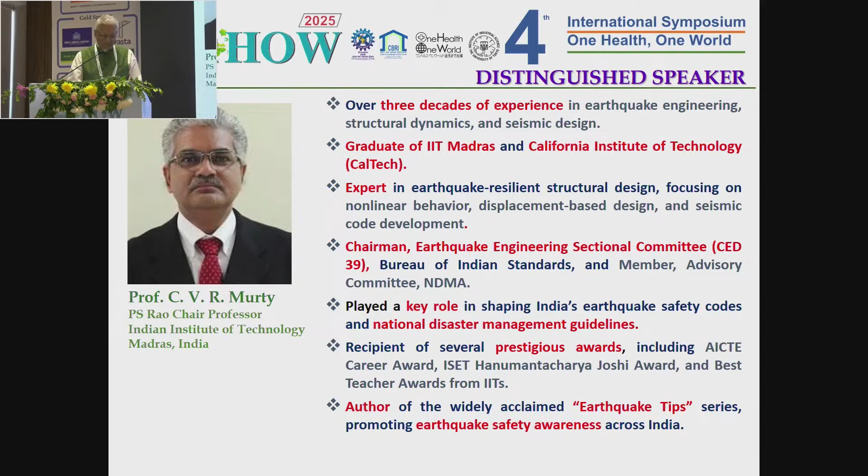I have only 2 requests. One is that together we can build competence in these nations. When I say competence, I'm looking at 3 interest groups specifically: architects, engineers, and artisans. There is so much good practice happening in these 13 nations that we need to collect and see if they can be adopted or adapted to these other nations, taking advantage of the hard work, experience, and lessons learned in past earthquakes and other disasters.

I look at this event as yet another beginning of a very solemn effort to protect the people in these nations. The numbers that Professor Pradeep Kumar mentioned of the losses of lives and property tell us that, at least in India, we are far away from getting those numbers down to single and double digits. But having said that, it's an urgent requirement for us to do it, and we are hungry and eager to learn from all the colleagues presenting, both from within the country and from other countries. Ladies and gentlemen, thank you for your time and attention.

Thank you, Professor Murty. We are highly honored to have with us our guest of honor, Dr. Krishna Vatsa, Member, National Disaster Management Authority, Ministry of Home Affairs, Government of India, New Delhi. I request Dr. Vatsa to kindly deliver his address.

Yes, this side. Sir, please take my number. No, I would like to check. Yes, sir. That's my screen. No, no, that. Can you see? No, my PPT. Okay, okay, thank you. Sir, can I? Yes, please. You, sir, just, is it here? No, sir, please.

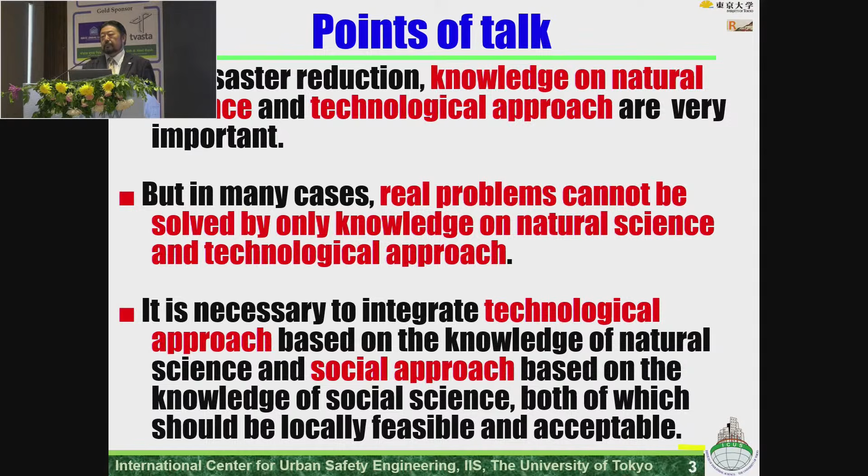And the other mitigation is, if you know this area is a dangerous area, for example, soil condition is bad, then by using land use management, the authority should not give permission to use that area or to construct houses. That kind of one we call land use management mitigation. And the second,

preparedness. Even from the viewpoint of a critical approach, it is possible, but it costs too much. We cannot adopt such a measure. In such case, we prepare something before the hazard attack, and then we can reduce the affected area, or we can reduce the negative impact propagation velocity. Namely, preparation of the organization to respond, or preparation of the recovery reconstruction plan, preparation of disaster manual, or carrying out disaster drills. These are the elements of preparedness.

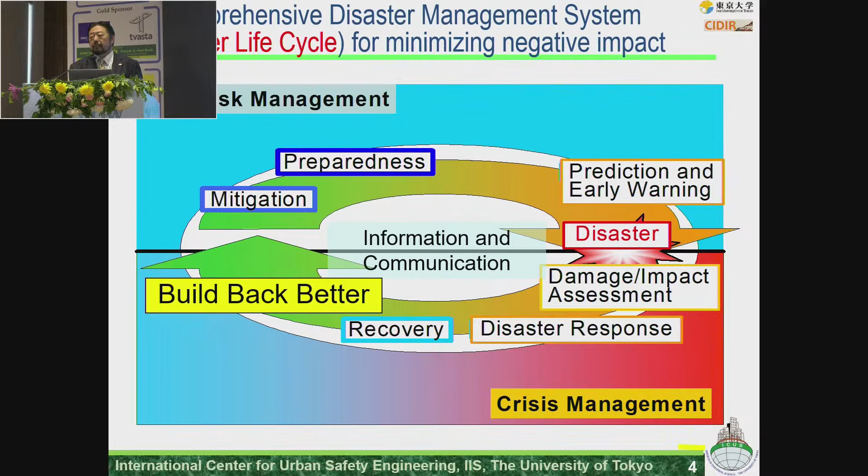To do this, not only scientists and engineers, we need a lot of different field persons. Otherwise, it's impossible.

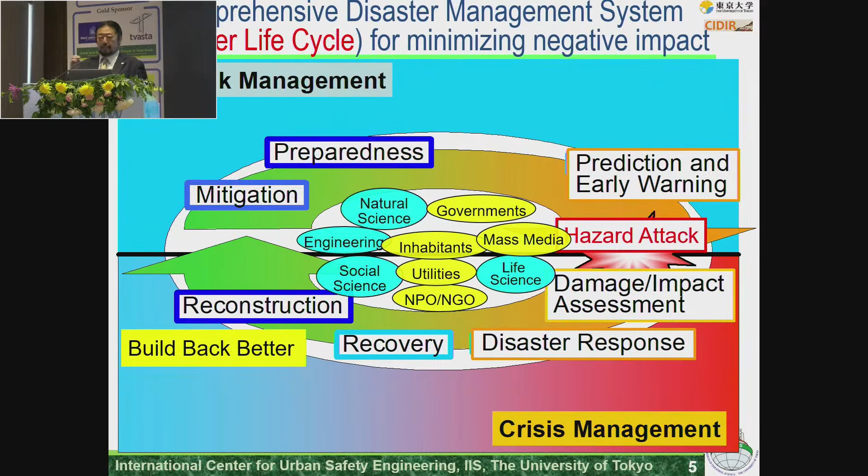Input is a hazard - earthquake itself, cyclone itself. When I break it down, that is the extent and area of the external force times probability. This is the hazard.

And the system, this is composed of two elements. One is natural environmental characteristics, the other is human-related, social environmental characteristics.

Population density, population distribution, age distribution, infrastructures, characteristics, politics, economics, culture, history, education, and so on. These are all affecting the lifestyle of the people.

And when these two are fixed, the time-related factor becomes relatively important. If your target area has 4 seasons, tsunami in winter versus tsunami in summer will make a very big difference. Also, the day of the week and occurrence time of day matter.

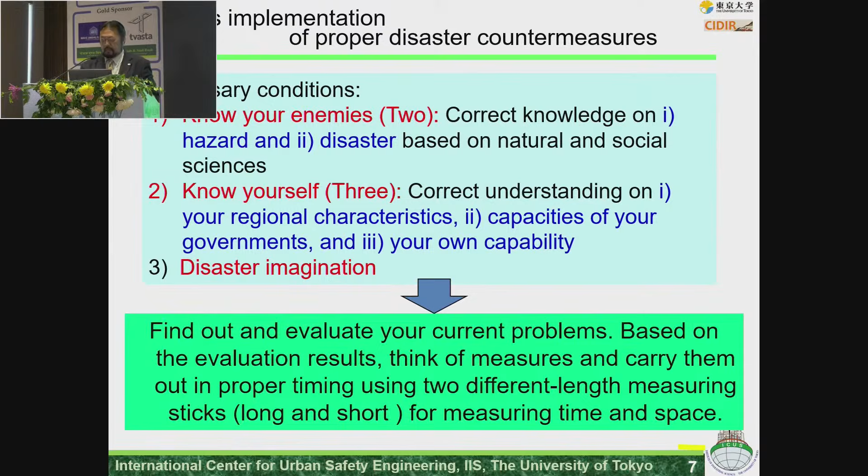And then also show the effects and guide the people. But if you repeat the short-distance ruler solution, there is a local maximum problem, and you get farther from the global maximum solution. That's why we should keep in mind two different length rulers and do the solution in a balanced manner.

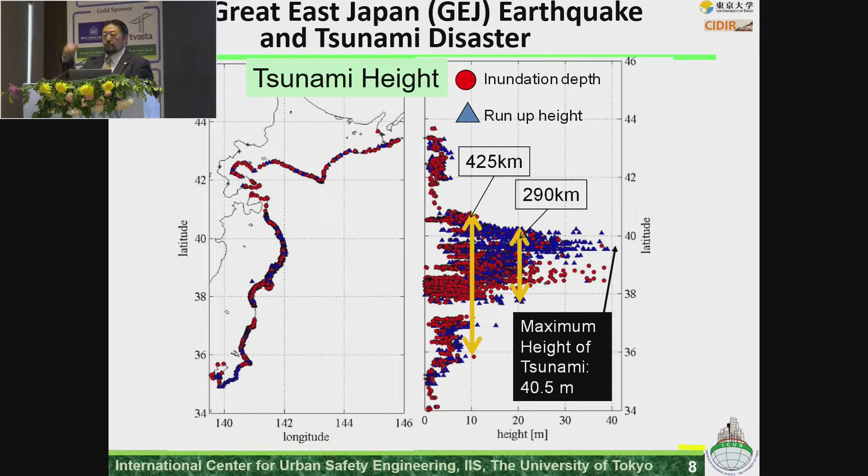I would like to show you some results, a real situation in 2011, the Great East Japan earthquake and tsunami. You can see the very, very high area tsunami attack, over 40 meters - that's higher than the roof of a 10-story structure. We also observed very, very strong ground motion, 3G.

But we could reduce a lot of the structural damage thanks to our senior researchers' research results. It means we could successfully reduce the damage due to a similar magnitude of hazard.

But, of course, we have problems - I will show you later. Totally, more than 22,000 people were killed. And mass media also reported a very big number of people killed due to tsunami and huge monetary loss.

But we should not simply believe the information through media. We should check one by one from the scientific viewpoint.

Even when we prepare very big structural countermeasures and non-structural measures, we should always keep in mind that there are two different aspects: positive effect and negative effect. But before we discuss them one by one, I would like to ask you the meaning of these numbers: 19.7% versus 3%. Do you know the meaning of these two numbers?

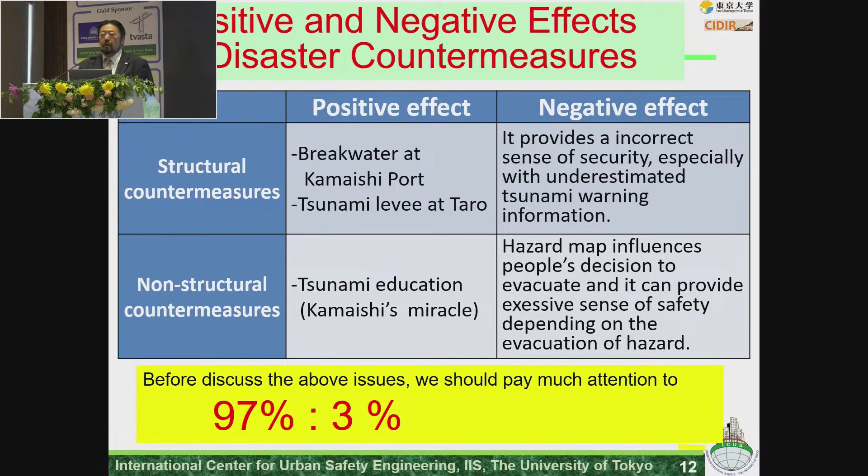Before I explain the numbers' meaning, let me show you some photos. This is the disaster management headquarters office of Minami Sanriku Town. When I visited and took this picture, the color of the structure was something reddish. On the roof you can see the telecommunication tower, and beside that, a white box.

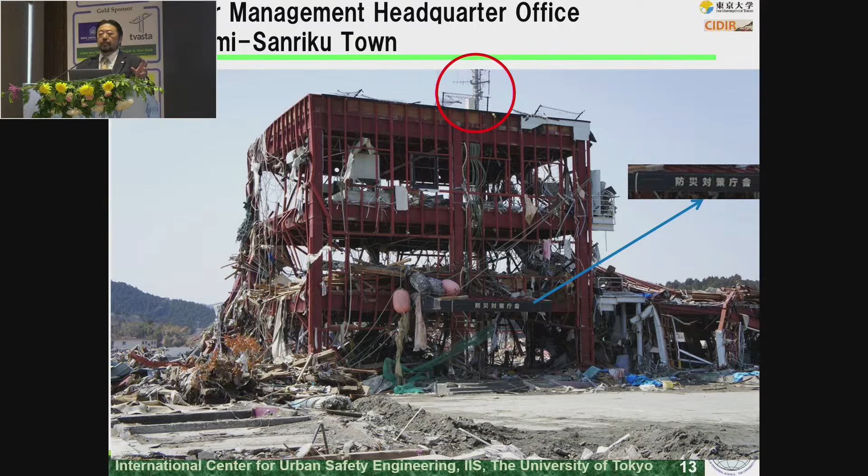I was very surprised to see the next photo I'm about to show you. One guy climbed up to the tower and took a photo, and fortunately that guy was saved and survived. Now let's look at the photo.

This red box is that, this white box, oh, this one. Okay, and this is the fence, these are the fence.

Again, I was surprised to see the photos taken by another person, a local photographer from the area. When I visited there were no structures around that headquarters office, but actually it was surrounded by many structures, and on the roof you can see many people wearing red jackets and blue jackets. The tower will be here, somewhere here.

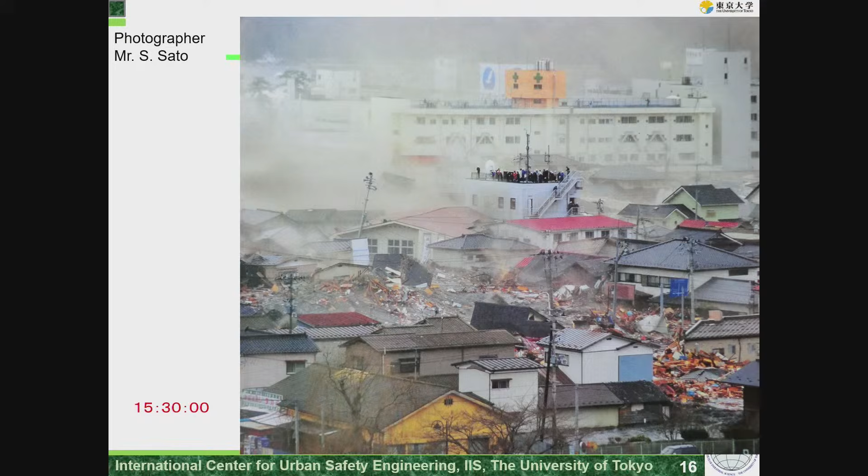Then you can see the guy who took that photo. If you watch very carefully, you can see some persons here holding the fence, and here is a very big wave. Behind or under this big wave there were stairs, and fortunately the stairs were not broken, so some people could be saved.

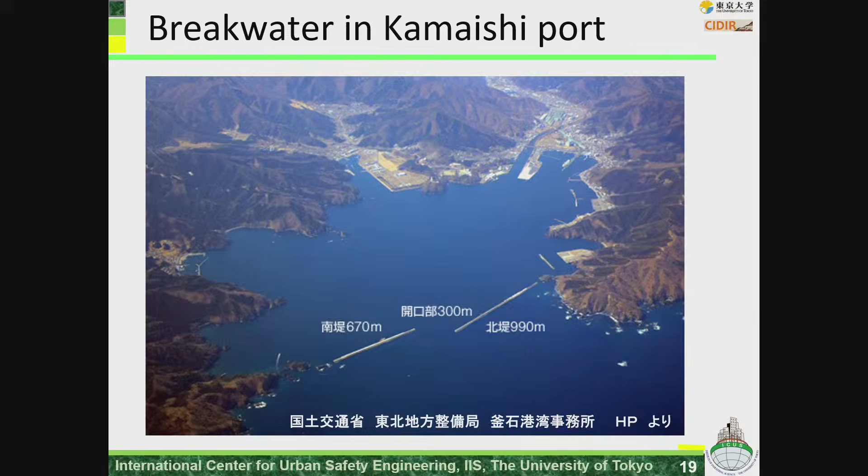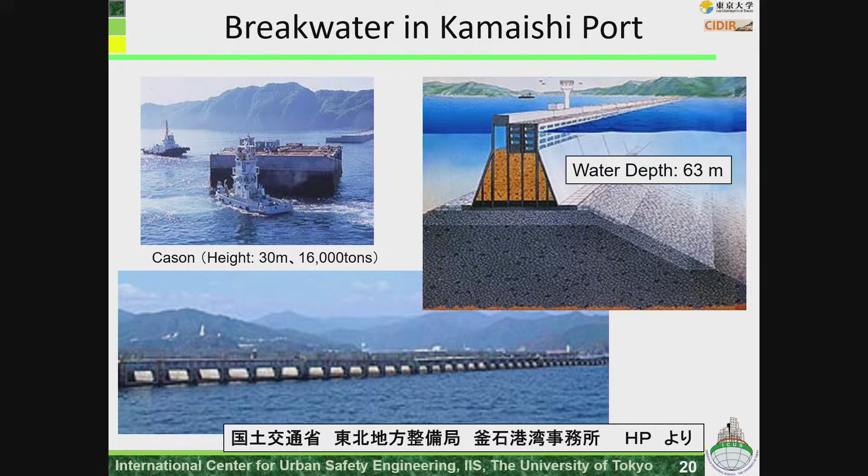This is the next one: the Kamaishi breakwater. This breakwater was written in the Guinness Book of Records as the world's biggest breakwater. The depth of water is 63 meters. They constructed a very big mound, and on it they put a caisson, preparing a very big tsunami breakwater.

But when I visited there, such a huge structure was broken. Mass media reported that we spent a lot of time and money, but these facilities could not play their expected role, and many people were killed. But this is wrong.

Based on a very high accuracy numerical simulation of the tsunami, what we found is that a 6-minute delay could be given to the people. Suppose you are a person inside the port and you need to evacuate - at the very last moment, whether you have 6 minutes or not makes a very big difference.

In a normal wave, the water particle just moves down, but the water itself does not move. In a tsunami, when the depth becomes shallow, the water from the base to the top moves together. Therefore, when there is a wall, it's impossible to prevent the overflow, but under the wall, a very big volume of water could be prevented from coming in. Therefore, inundation depth and runup height could both be reduced by 30 to 50%.

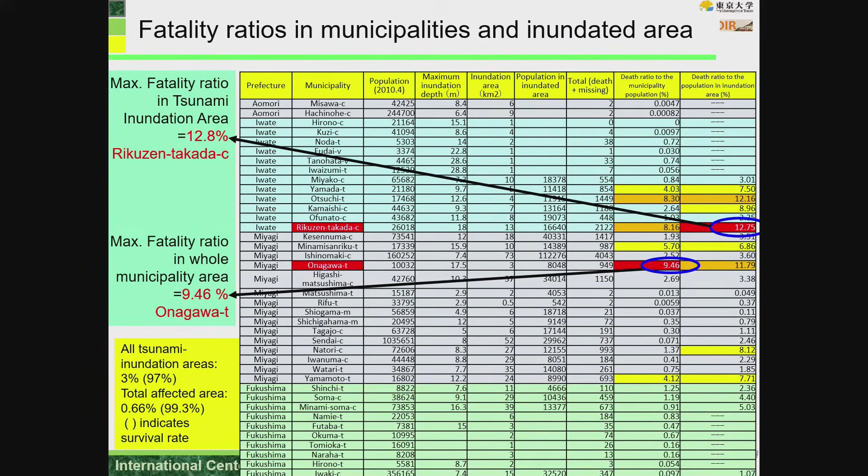When I check municipality by municipality, only within the inundation area, the highest fatality ratio was in Rikuzentakata city, at 12.8%. When we include the whole area of the municipality, Onagawa-cho town had the highest fatality ratio at 9.46%. But when we compare with the past, you can see that this time's 9.46% was the highest recently, though in the Meiji Sanriku tsunami about 100 years before, the fatality rate was much higher than this time.

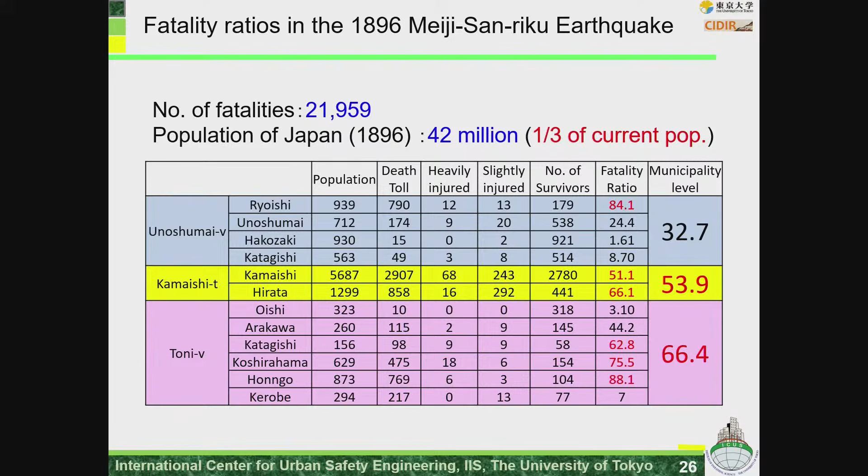Especially in the Taro area, during the Meiji Sanriku earthquake the death rate was 83.1%, in Showa it was 32.5%, and this time it was 3.9%. Based on lessons learned, they implemented many disaster countermeasures and drastically reduced the damage. But mass media could not analyze or report the real situation.

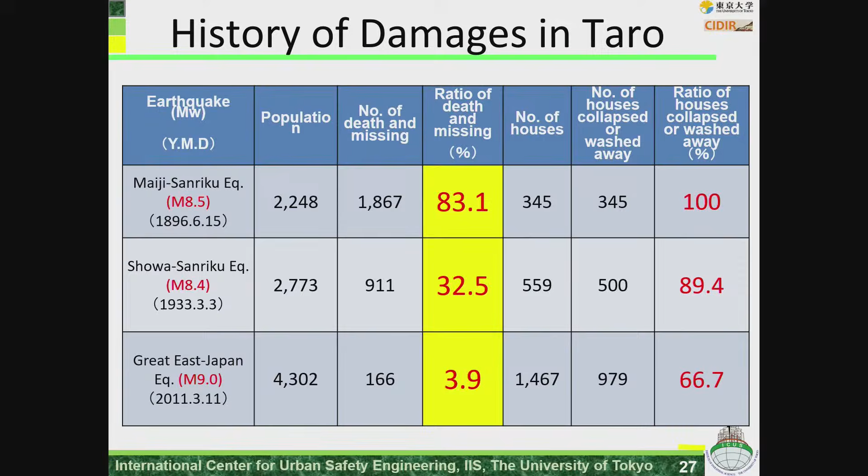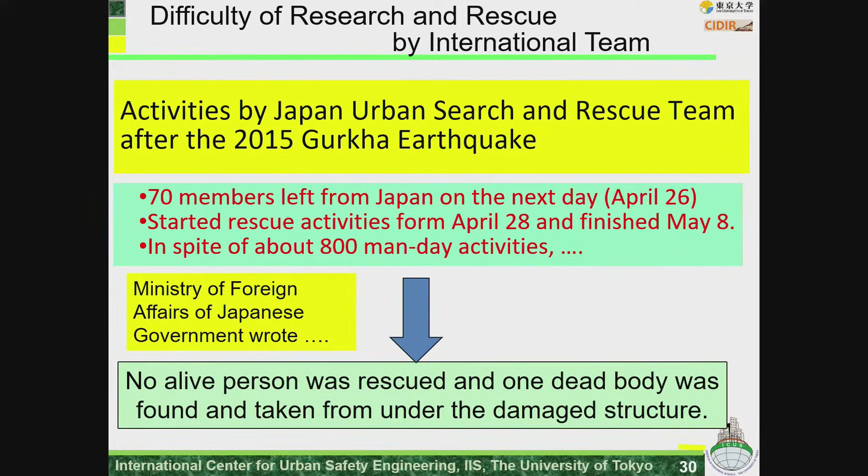In total, around 800 man-days of activities were conducted. The Japanese Ministry of Foreign Affairs wrote on their website that for these activities, the government of Nepal and Nepali people expressed their sincere appreciation. But could you guess how many people could be saved? Unfortunately, how many dead bodies were taken care of by the Japanese team? Because of time limitation, I will just tell you: no people saved, just one dead body. This is all the Japanese team could do.

So what I'd like to say is, it is quite difficult to save people. But many people, especially from developing countries, think that emergency response is the most important countermeasure of disaster management. This is wrong. Pre-disaster countermeasures are quite important. But to implement pre-disaster countermeasures, we should pay attention to social systems and human behavior, not only the engineering approach.

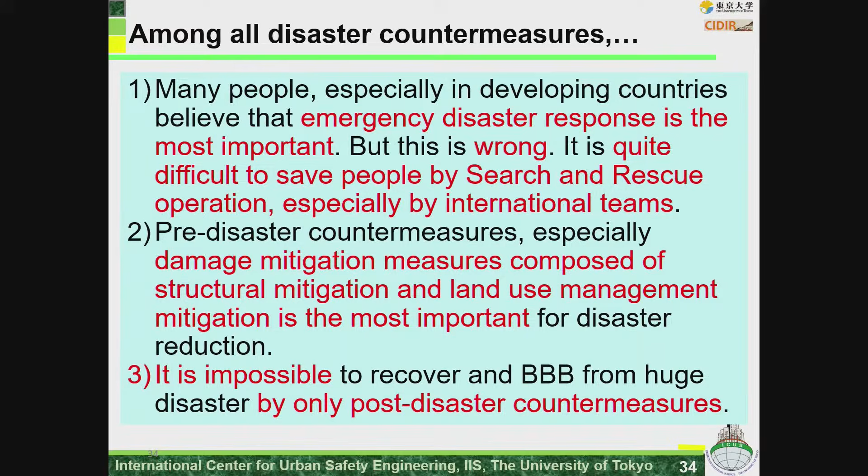Even if you establish a proper design code, if the people do not follow it, nothing happens. Your developed code may be very sophisticated, very advanced, but if people do not follow it, I can say that your code is a bad code.

Then how do we let people follow it? There are three patterns, three types. One is the penalty system, but where governance in a country or region is limited, this system cannot function well. A much better one is the incentive system: if you follow it, you get a benefit. Number three is to disclose information and guide people. If you use this information well, you can have benefits in the future.

I will skip this. So when I look over disaster-related projects in the world, 90% of projects just focus on the emergency phase, by number of projects. When we check the budget by the World Bank, 70% is focused just on emergency, 20% on recovery and reconstruction, and preparedness or mitigation gets less than 4%.

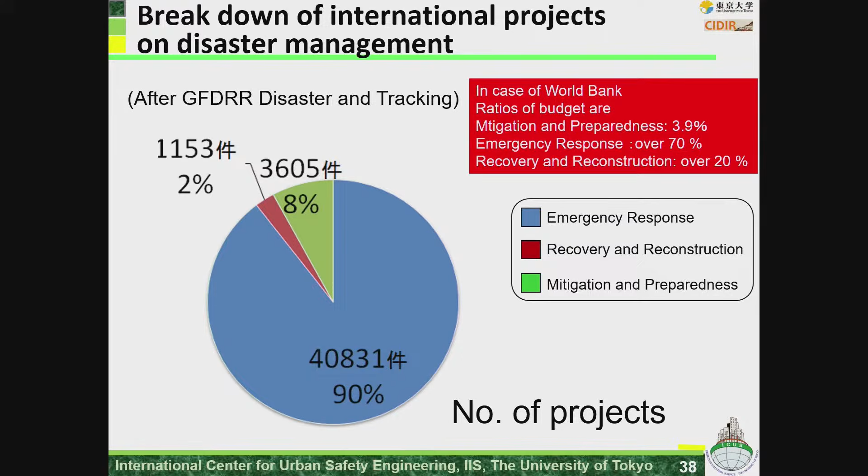First, it's easy compared with pre-disaster and post-disaster countermeasures. If you want to establish pre-disaster countermeasures, you should visit the site first and survey the real problem, then establish an original program one by one - it takes time. But for emergency phase projects, once you establish the system, even if the target area's characteristics are different, you can apply the same methodology. Post-disaster countermeasures fall in between.

When we check, Japan was previously fifth, but now it's first. The US is now in the second position. But in the US, 90-91% of money is used for emergency response. In Japan it's 54%, which is the world's biggest for pre-disaster focus. Next, how to solve the current situation and understand the reasons.

First, as I explained, it is easy. The next reason is that if you are a representative of a project, you are always asked by investors or donors who gave you money to have high presence. The easiest way to have high presence is to let the media report it. Media reports disaster-related activities only after big disasters. Therefore it's easy to get presence, which is why even though the real meaning is quite limited, many projects focus on the emergency phase.

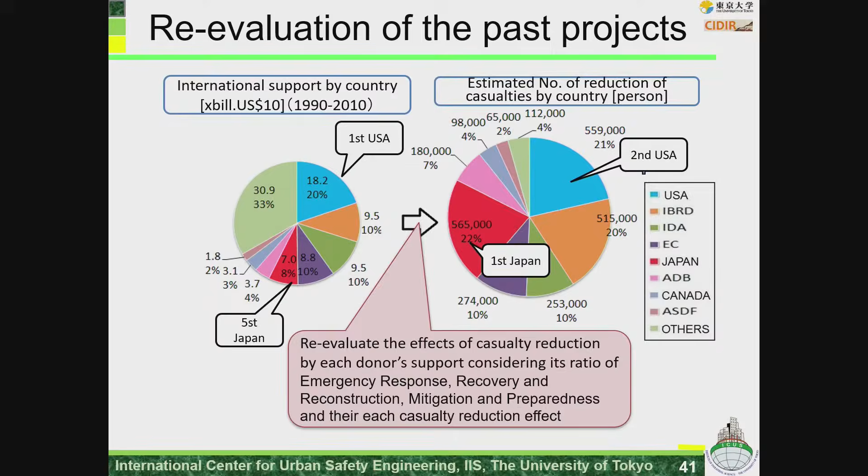From now, we in Japan might face a very, very big disaster - a national critical disaster, like the 1755 Lisbon earthquake or the 1970 Bhola cyclone in Bangladesh, which at that time was East Pakistan. It is quite difficult to recover by only post-disaster countermeasures. So how do we solve such a situation?

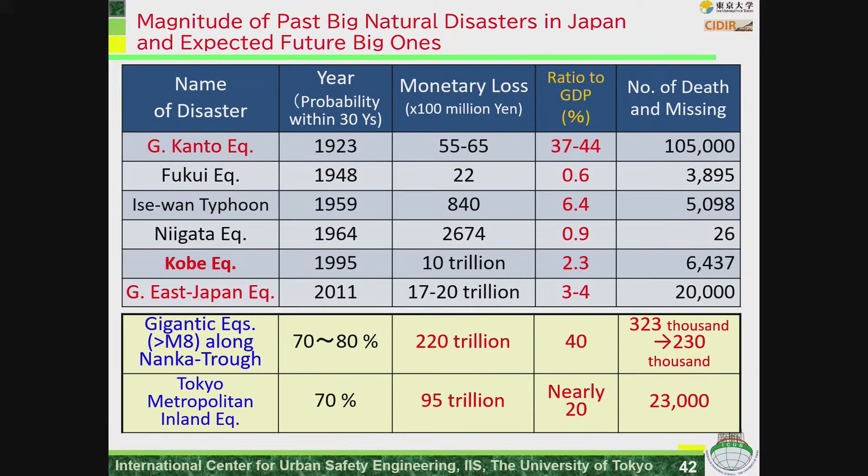Now in Japan, population, society, and budget limitations are getting tighter. Therefore, there are three players for disaster management: public support, mutual assistance, and self-help effort. But public support will be getting smaller. So how do we cover that reduction? Through mutual assistance and self-help effort. Who are the players? Individual persons and companies.

So far, when we ask them to do disaster management countermeasures, we are appealing to their conscience and morality. But it will be impossible to continue this way. We should change our mind - disaster countermeasure is not a cost, it is value. Also, disaster is a very limited phenomenon in both time and space. Therefore, disaster countermeasures that give us benefit only at the time of disaster are quite difficult to invest in or donate to.

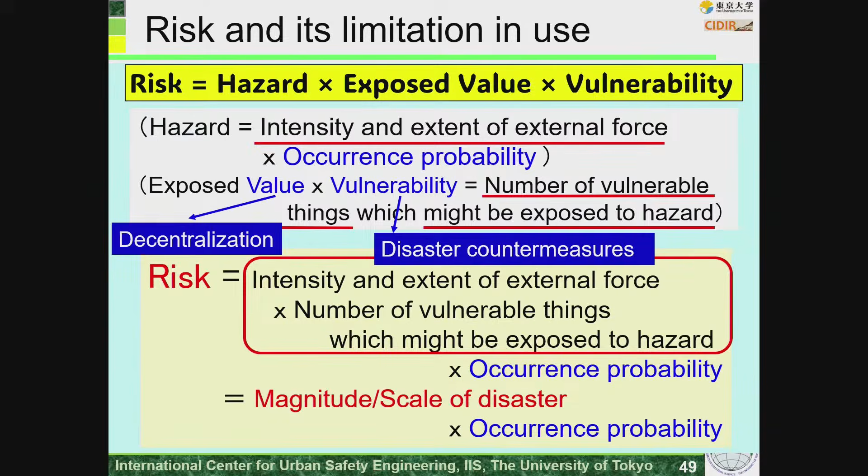So what should we do? First, establish a method for accurately assessing a company's disaster risk or disaster resilience and make it an international standard. Second, design and create a system in which the assessment results are directly linked to the company's stock price - this is the incentive. Third, each company is encouraged to proactively take measures to reduce disaster risk or improve disaster resilience in order to increase corporate value.

Fourth, decentralizing the proper corporate functions will also alleviate over-concentration in the Tokyo metropolitan area. As a result, Japanese companies and citizens will be richer, rural areas will be revitalized, and future disasters will be significantly reduced.

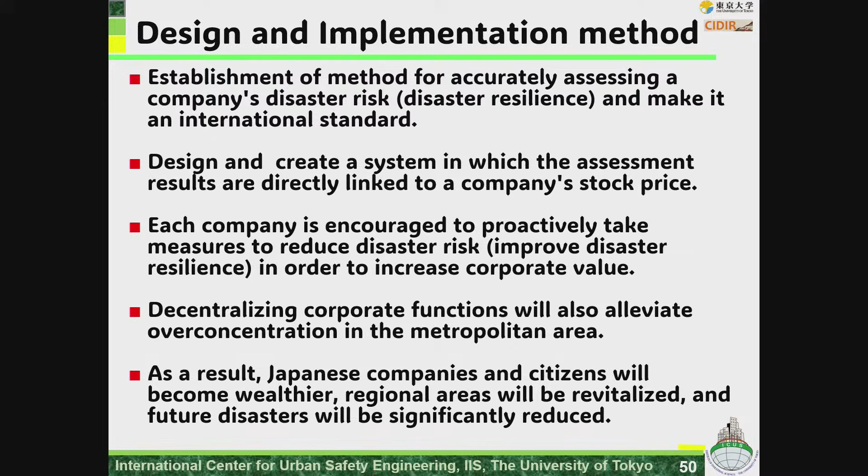Many people do not think this kind of behavior or this kind of system is a disaster management system. But this kind of approach contributes a lot. So we should open our eyes and study more about social systems and human behavior, and propose solutions. By combining the technical approach and social approach, we can solve the problem.

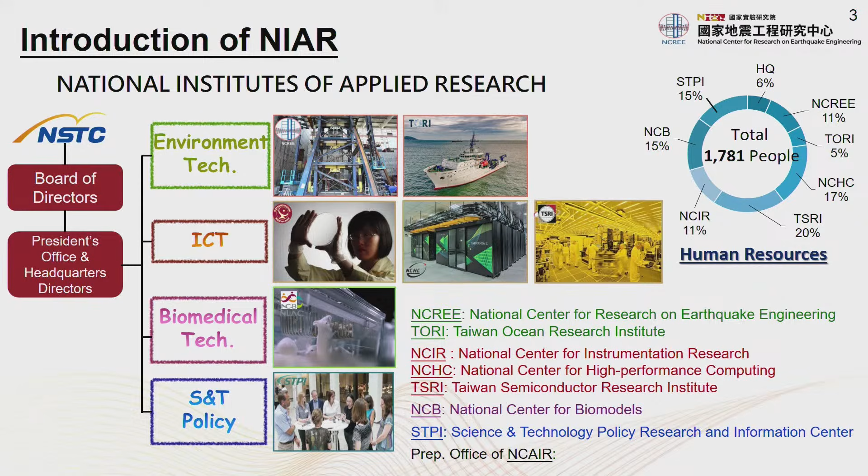NCREE was established in 1990 on the campus of National Taiwan University. Our mission covers before the earthquake, when we do preparation; during the earthquake, emergency response; and after the earthquake, post-quake recovery. We want to integrate all the researchers in Taiwan and also promote international cooperation with others in the world.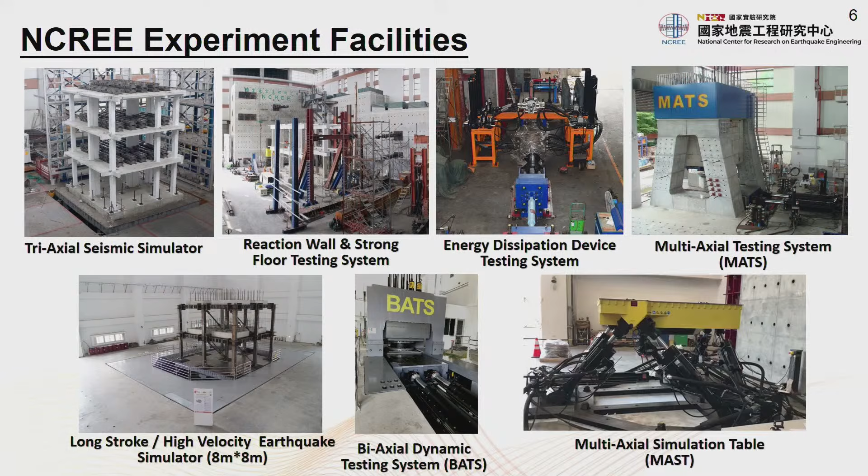Now I want to introduce the structural retrofit program for school buildings in Taiwan. After the 921 earthquake, some school buildings collapsed, and NCREE helped the government develop strategies to retrofit school buildings to protect the students. We determined system capacity not only in the laboratory but also through in-situ testing at the Kowu Elementary School to understand the performance of existing school buildings.

We developed a screening strategy involving preliminary evaluation to identify potentially dangerous school buildings, followed by detailed evaluation to select the truly damaged buildings for retrofit. We developed economical, typical retrofit methods, using jacket columns to enlarge columns, and shear walls or wing walls to increase capacity in vertical elements.

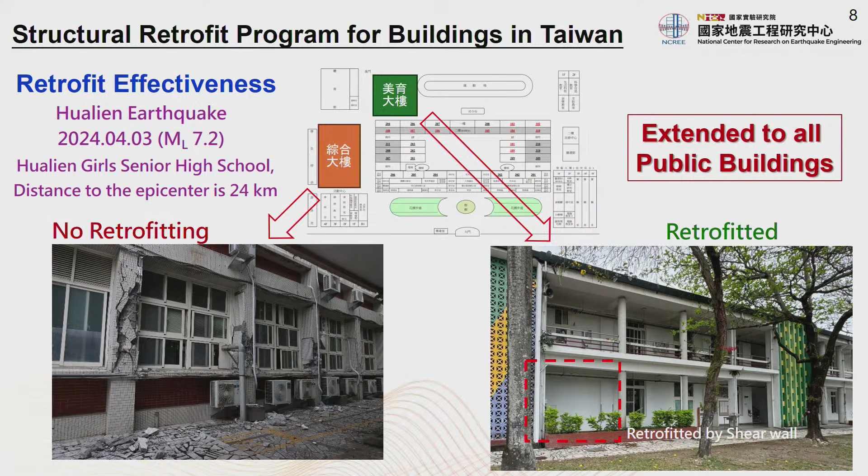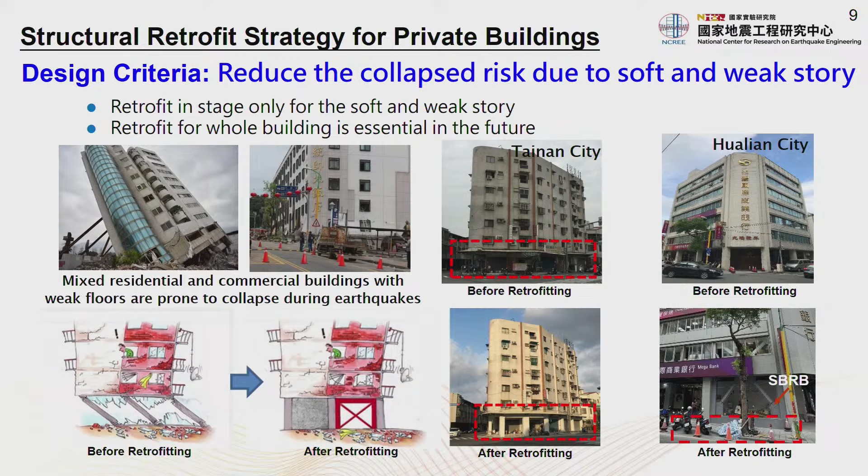For a private building, it's difficult to ask the owner to pay for the retrofit. So NCREE developed some strategy for private buildings. It was observed that mixed residential and commercial buildings often have a soft and weak story on the first floor. So the strategy is to retrofit only that floor first, reducing the collapse risk due to the soft and weak story. In the first stage, we ask the owner to retrofit only the soft and weak story, and the whole building will be retrofitted in the future.

We also provide a website so people can check whether their house is safe or not. The owner just inputs the dimensions and amounts of the columns and walls. Then, based on a preliminary evaluation, we can tell them either your house is safe enough, or you need to ask a professional technician for a detailed assessment, or you need to retrofit.

I want to introduce the BRB, the buckling restraint brace. The BRB has stability and energy dissipation and is easy to construct. So it is applied to new buildings and also in retrofit buildings.

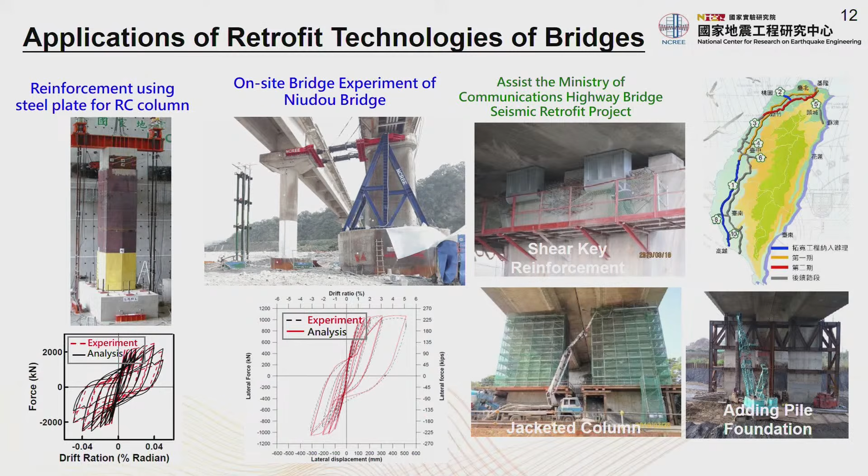We conducted tests in the Taiwan laboratory of NCREE for full-scale experiments. We focused on lifeline systems, such as busways for power, multi-layer piping systems for water, and sprinkler piping systems, and considered the failure modes of ceilings with various levels of floating ceiling systems.

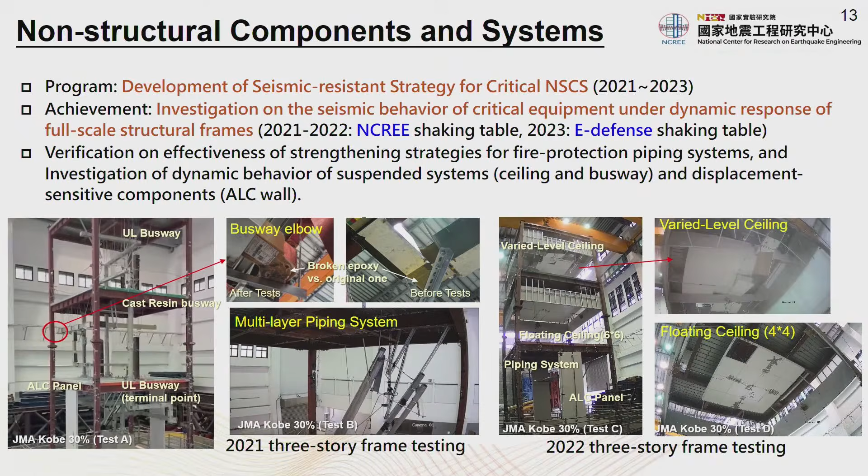After the experiments in Taiwan, we developed retrofit strategies. Then the next year, in 2023, we put our specimens, including both the original and the retrofitted one, to be tested at e-Defense using a full-scale 10-story steel building.

Here is an example of the busway. Not only did we do experimental studies, we also conducted numerical studies about the performance. We defined a finite element model for the busway system and all the properties of the pipe, the busway, and all the joints, including the spring isolator.

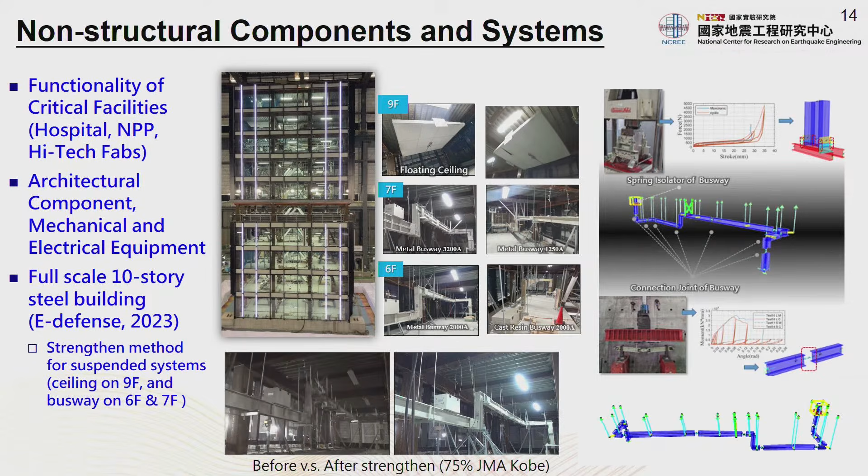The properties were tested in the laboratory, and then we could see the dynamic behavior, which we put into the finite element model to see the response after excitation.

Now we are focused on the spring-isolated suspended air handling unit. This is a real case from the Hualien earthquake, which we duplicated in our laboratory based on a three-story frame. You can see large horizontal displacement occurred, which will impact the adjacent piping system and cause flooding.

But we don't want to limit the function of the spring isolation, so we cannot fix the unit directly. So we tried strategies such as a slack cable wire or a stopper to restrain the horizontal displacement. We can say these have some effectiveness, but not enough, because due to the impact, the wire may loosen and the stopper may fail.

So now we do another experiment. We fix the unit onto a rigid frame braced by the seismic snubbers, such that we can maintain the vibration isolation along the vertical direction, but during the earthquake we can provide restraint along the horizontal direction and also provide damping in three directions. You can see from the video that this retrofit one only vibrates a little, but the other one, isolated only by the spring without the restraint, just failed.

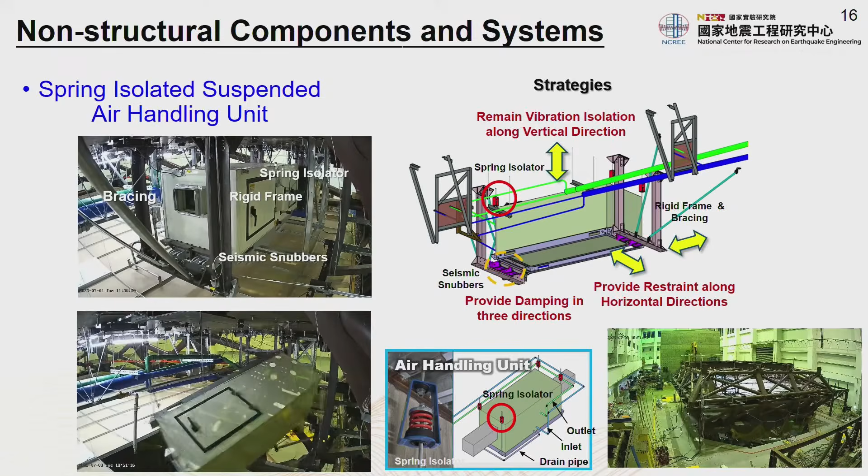Okay, now I want to introduce some research for the high-tech factory. The semiconductor industry is very important in Taiwan, so we want to keep the function, especially after an earthquake, so we can reduce the shutdown time.

So first we see the ceilings in the clean room. We know that in the clean room, the ceiling is hung from the upper floor, so the excitation point is on the upper floor, the red one here. But we want to use a tester frame on the shaking table. We have to control the input motion of the shaking table such that the anchor point response will be the same as the upper floor in the clean room. So basically we use a rigid frame, however it's not really rigid. So we have to determine the transfer function, and then determine the input motion as the blue ones, such that the response on the top of the frame will be the same as the excitation on the anchor points.

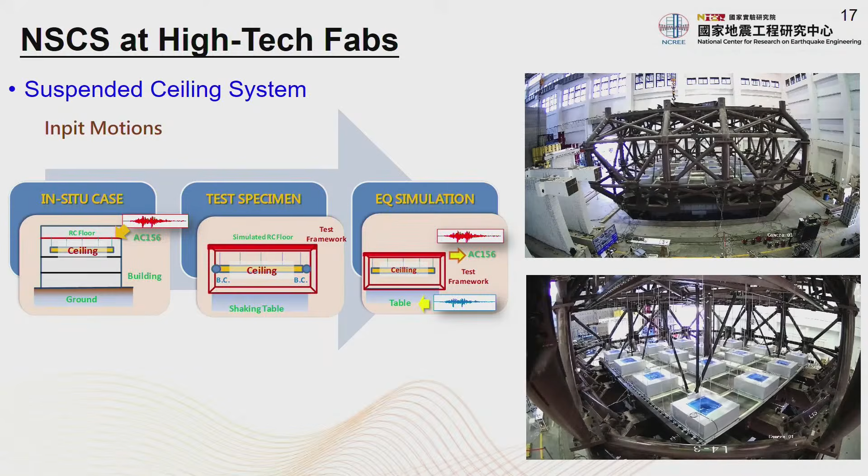Now we know the response of the RC floor based on the guideline, so we can determine the guideline on the RC floor. However, the board is anchored on the cap position, so we do some in-situ ambient vibration test in the clean room to determine the transfer function from the floor to the cap, and then we can modify the floor motion to the cap response, and use the red one as the input motion of the shaking table.

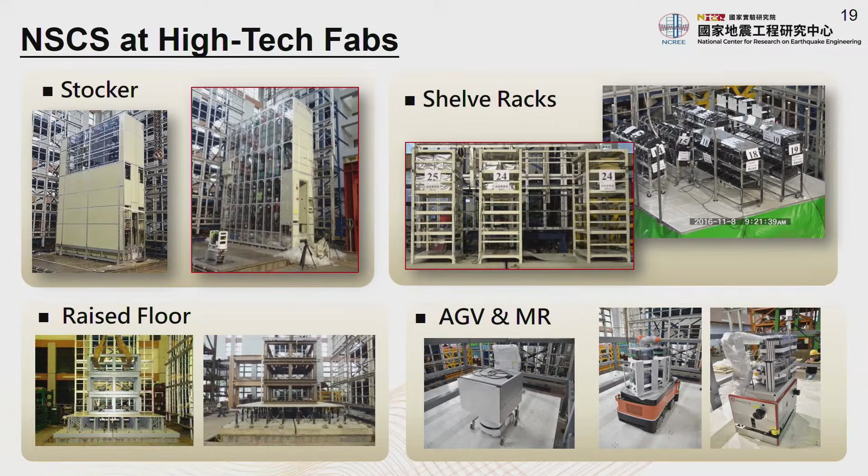And also we do some research about other process tools such as the stockers, shelf racks, and the raised floor, and AGV and MR in the clean room.

And then, energy is a very important issue in Taiwan, and now we use some wind energy. There are many onshore and offshore wind farms in Taiwan. However, Taiwan has high seismicity, different from that in Europe. So I have to help the government define some criteria for the seismic qualification control. We have to determine the method, and determine the function of the critical component in the nacelle.

But however, it's a procedure which is based on the real nacelle, so we use a finite element model such that we can determine the response. It's just a tower. We can determine the response on the top of the tower, and this is associated with the design ground motions.

And then we also have the finite element model of the whole nacelle, and a detailed finite element model for the critical component, which is the control panel, and will be very significant in the earthquake. So the excitation of the nacelle is just the response on the top of the tower, so we can use that response as the information for the time history analysis, and also as the information for the shaking table.

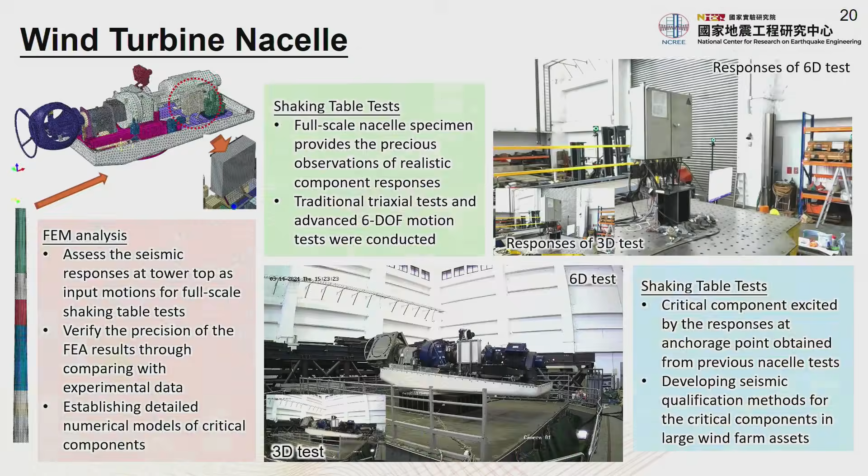We developed and know that the base isolation system is good, but for some existing buildings it is impossible to uplift the building to put on the isolator. But there are some important components that should be protected. So we developed a small isolation system called the multi-function rolling type isolation system, which has the function of energy dissipation and self-recentering capability.

Here's one example on the shaking table. You can see a mask is put onto the isolation system and placed on the shaking table during the test. You can see the robot inside the mask can keep its original function, even though the table is shaken based on the Chi-Chi earthquake. So this can apply to many equipment, such as high-tech equipment and servers.

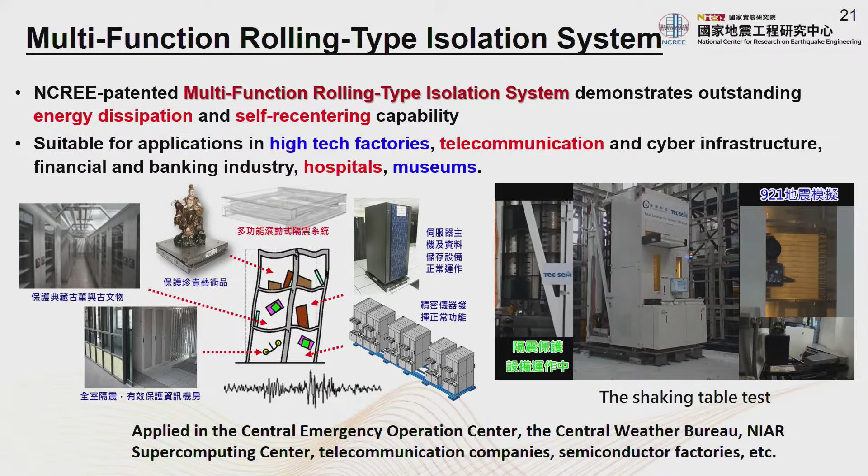Now I want to introduce the early warning system. In Taiwan, NCREE, together with the Central Weather Administration, developed the data hub, and the regional early warning system is developed by the Central Weather Administration. That just determines the magnitude, epicenter, and depth of the earthquake, then estimates the PGA according to the attenuation law. NCREE developed the on-site early warning system, which measures the rapid P wave and then estimates the following intensity of the shear wave.

The data hub combines the two systems, so we can allow the warning signal to reach the public before the strong shear wave arrives. For example, one site can be triggered and give an alarm before the shear wave front, and after the regional early warning system alarms, we can also use the on-site stations to modify the signal and modify the predicted amplitude.

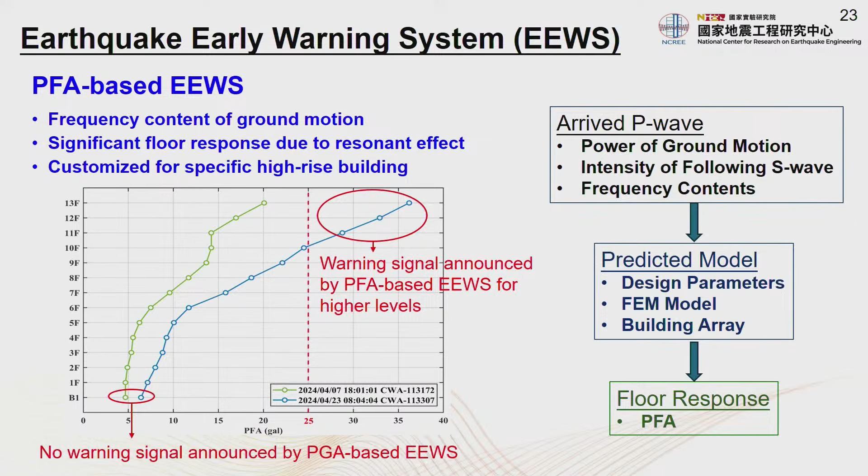Okay, here's structural health monitoring for the building. We put accelerometers on the building, and all important buildings, and all the data transfers to the central server. So for the building, we can obtain long-term structural monitoring. For example, we can measure the period of the structure long-term, and if the period changes significantly, we know something happened. During the earthquake, we have real-time recording of the structural behavior, and based on the data we can determine the building's drift ratio is beyond the safety threshold, and give some alarms.

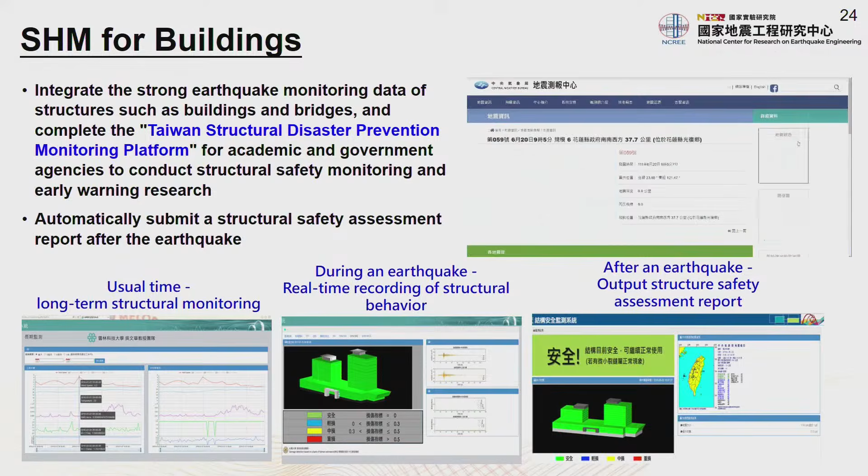And also for the bridge, we can know the property of the specific bridge. We have field loading tests by truck, and then we have a numerical model to see the response. Then we can define the threshold of the warning or action, and put some sensors on the bridge to take data for long-term monitoring. If something happens, we can give a report and give an alert or take action.

And then after the earthquake, all the data will transfer to the emergency center. And then we know which building may be damaged, severely damaged, based on our systems, which combine the geometric shape and the mechanical properties.

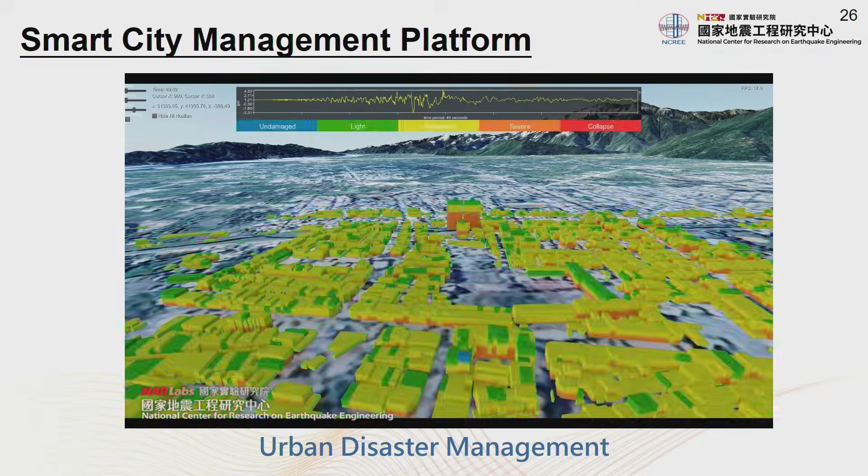Okay, and here shows some service platform. First one is the structural analysis software. We develop the software, and the engineer can use the software on site. It includes PISA 3D for the dynamic time history analysis, and T-SPA and T-STAR for the buildings for the pushover analysis, including RC and steel and dynamic analysis. We can also develop the design spectrum for the specific site, and then select the ground motion. The ground motion is the best to compare to the response spectrum.

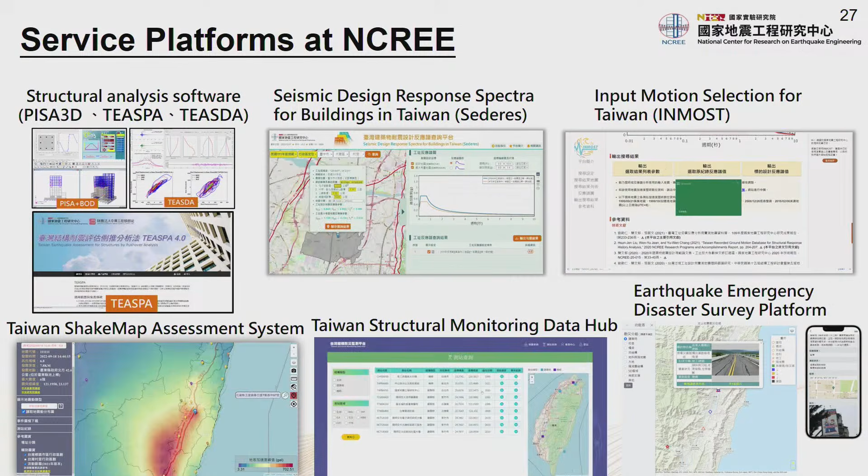Okay, and we're going to show the AI enhanced digital twin for disaster relief. For large-scale damage recognition, we can see the damage area based on satellite or aerial images. Also, after the earthquake, we can generate a 3D model and know the entrance for rescue plans. And we can use AI to read the architectural drawing and know the size of the column and wall for preliminary seismic evaluation.

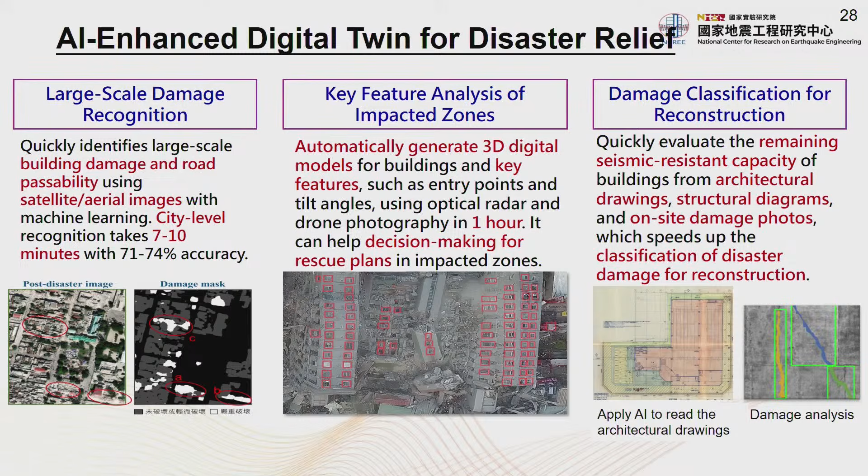And finally, I want to show the public education. Every year, we host an event called IDEERS, International Seismic Engineering Model Competition. We ask students from Taiwan and international schools to put their models on the table and test their performance. We also maintain a website and content for popular science.

And especially we have the volcano observatory open to the public, where we provide an immersive experience for the people.

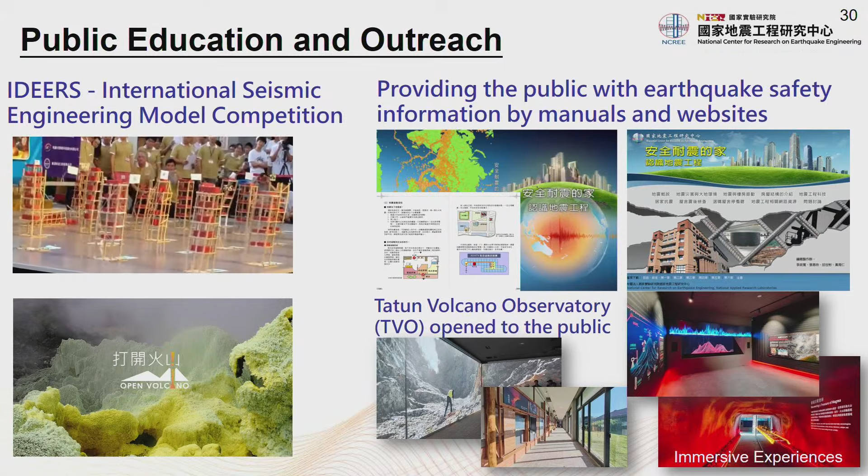Okay, that's all of my presentation. Thank you.

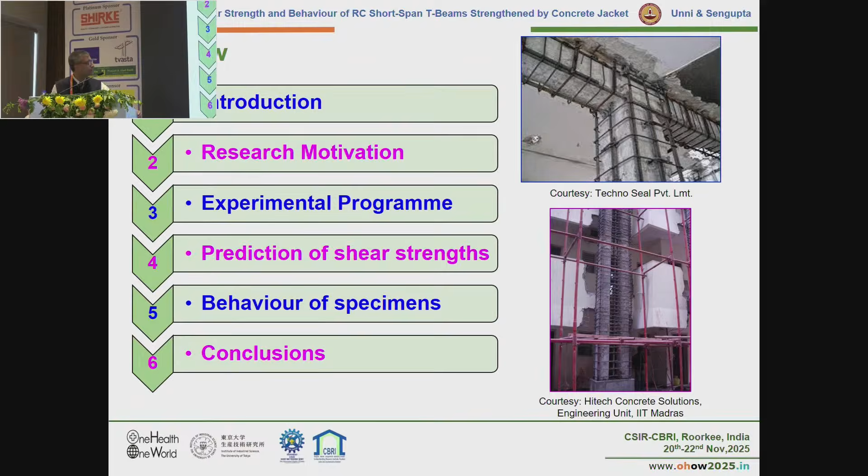Shear failure is a concern for any short span beam. Even retrofitting for shear is necessary for long span beams that have to be retrofitted for flexure, and we know that the shear strength has to be more than that of the flexure.

Shear failures can occur because of insufficient design or detailing. The retrofit measure should first be a global retrofit, meaning we handle the whole building as a whole, and then we should go for local retrofit measures. Within that there are a few options, and I'm focusing on concrete jacketing.

In this study, we first studied the use of microconcrete as a jacketing material. We also studied some interface properties using different types of specimens, like slant shear specimens. Two orientations of stirrups were studied: vertical and inclined.

The reason we went for inclined stirrups is that typically shear cracks are diagonal, and under dynamic load we wish to have bars which will not kink during the formation of a diagonal crack.

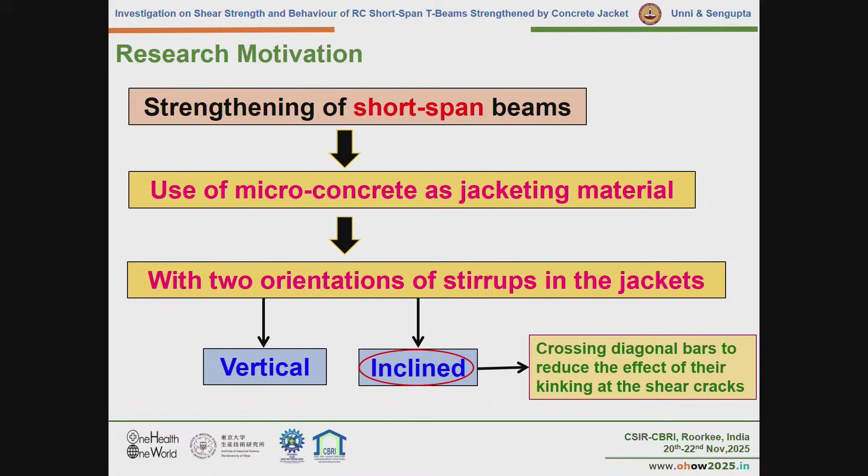These are the set of specimens I'm presenting: an original beam with a very minimum amount of stirrups in the test region, and the retrofitted beam with inclined stirrups only in one direction, since we are doing only monotonic loading.

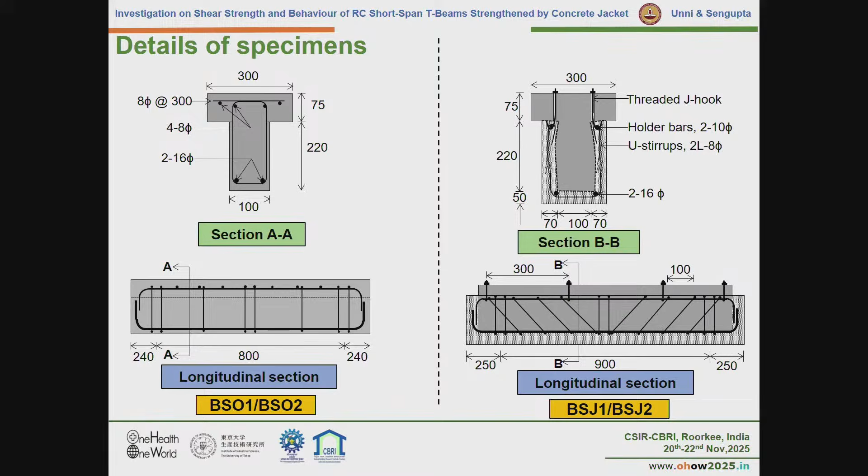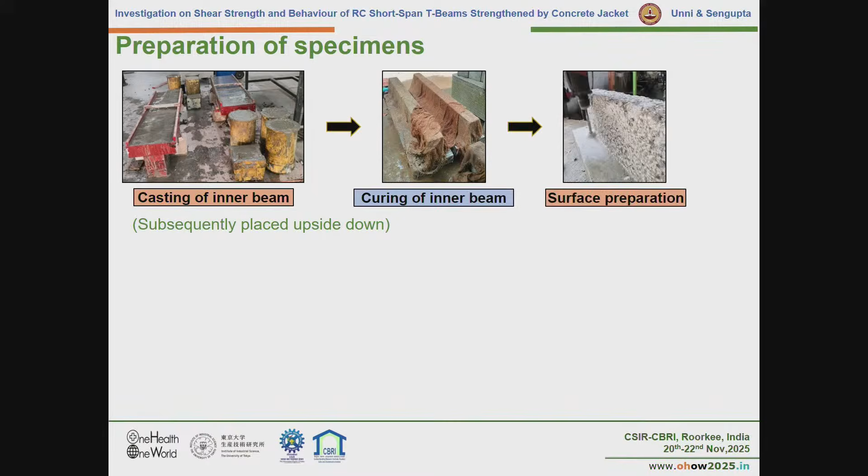The steps of retrofitting are: after casting the original beam, we prepare the surface, place the reinforcement cage, and then do the further casting and curing.

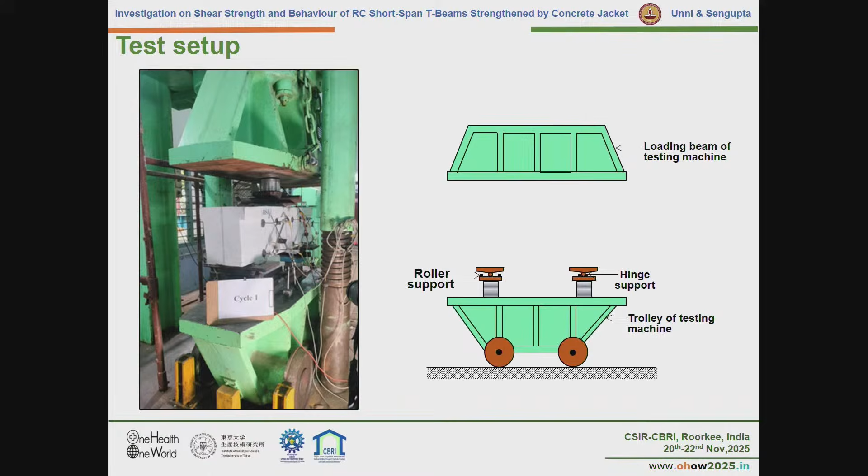The test setup used a column testing machine, needed because we had to fail the specimen in shear, requiring a fairly high strength machine. Within the loading frame, we place the supports with load cells, then the specimens, and then apply the load.

Regarding instrumentation, we monitored the shear deformations in the test region, and in order to measure the shear deformations we used LVDT rosettes.

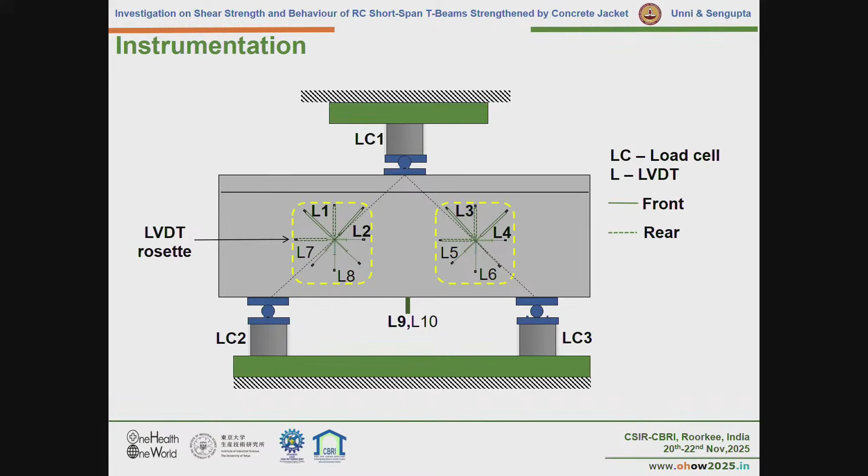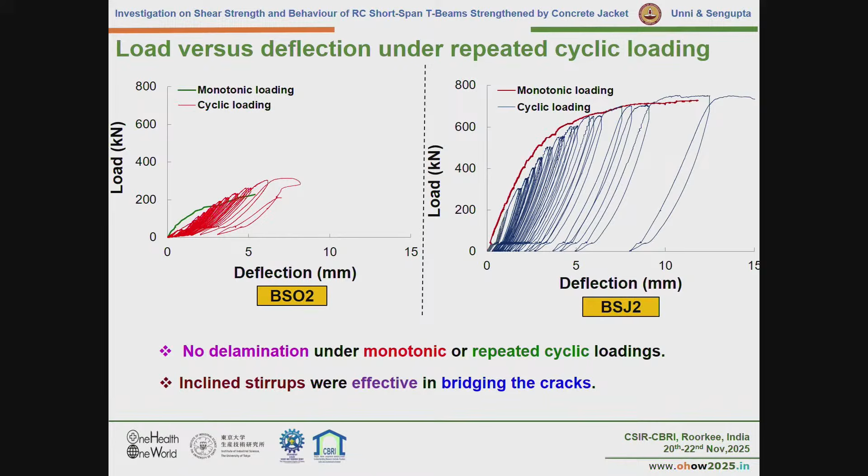Now coming to the prediction of the strengths. For any shear governed type of beam, the method that is followed is the strut-and-tie method, where the stresses in the concrete get reoriented after the major cracking in the diagonal direction. We have certain expressions by which we can predict the strength of an existing beam.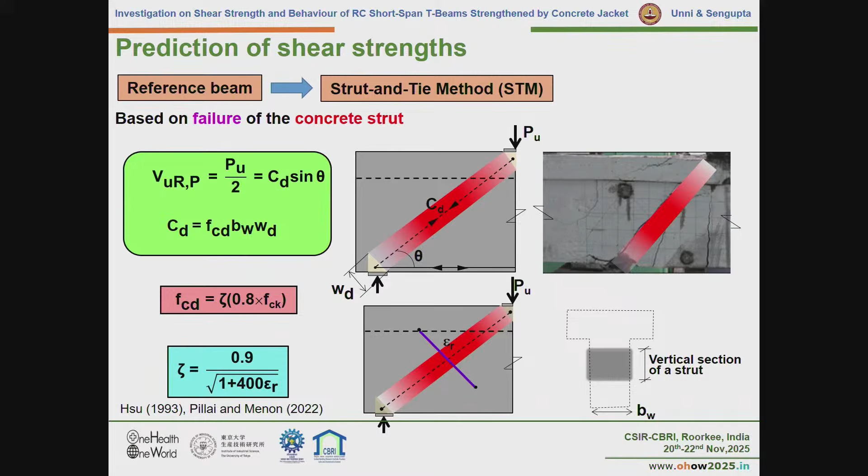Whereas if it's a jacketed beam, then we need to enhance this procedure by including the heterogeneous section, and there we can use some sort of sandwich model to incorporate the jacket along with the original cross section.

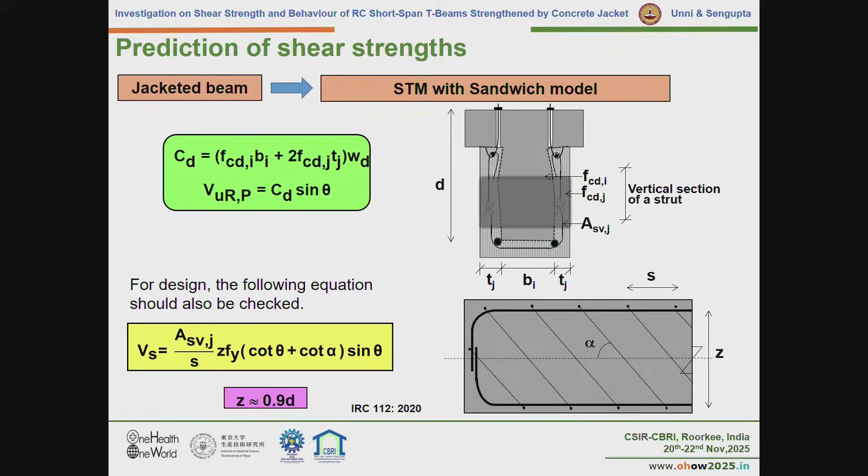Now in design, of course, it will not be just the strength governed by the failure of the strut, but it will actually be governed by the failure of the ties if the ties are yielding first. This is an expression which can be used if the ties are diagonal.

Now next is the behavior. Behavior means that if we go for a performance-based analysis, then not only do we need the strength, but we also need the behavior under shear deformation. Now, the behavior under shear deformation is much more difficult to predict as compared to a flexural deformation.

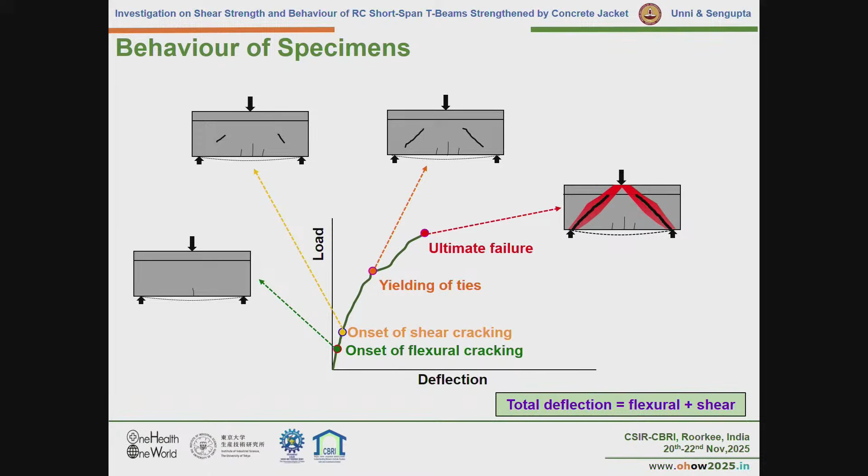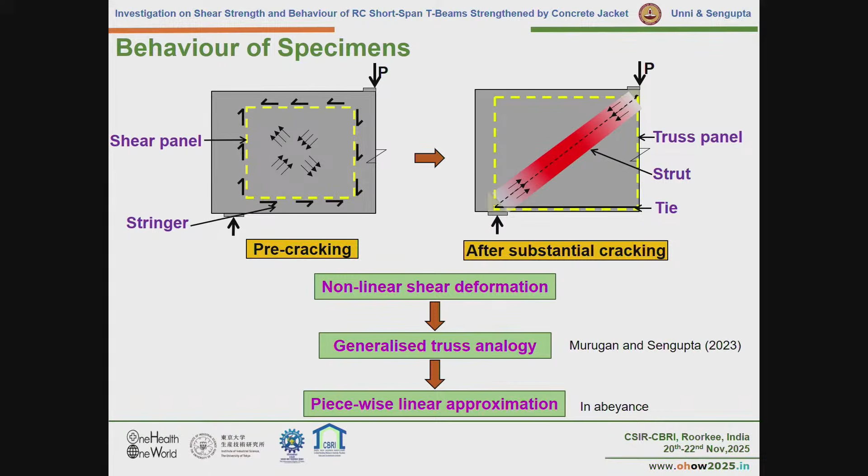And these are the different stages through which a shear panel gets gradually transformed to a strut-and-tie type of model. That means we have to have a transition from the shear panel to a truss model. There is a method called generalized truss analogy by which we can try to predict the behavior. Right now, my student is trying to do a linear approximation of the generalized truss analogy.

To conclude, we did not observe any delamination between the original concrete and the jacket. This was also corroborated by the failure criterion we had developed using the slant shear tests.

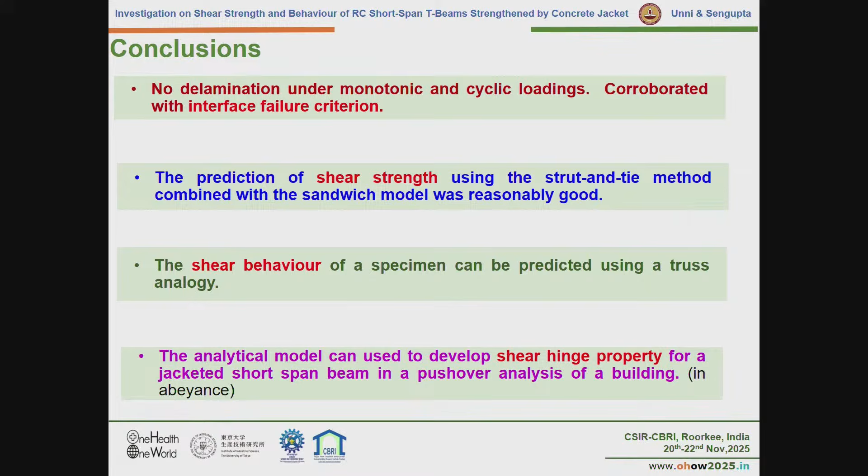To predict the shear strength, the strut-and-tie model in association with some sandwich approach was reasonably good. The shear behavior can be predicted by a truss analogy, however, we are yet to get the results. And now this analytical model can be used to develop what is called the shear hinge property for short span beams in the pushover analysis of a building.

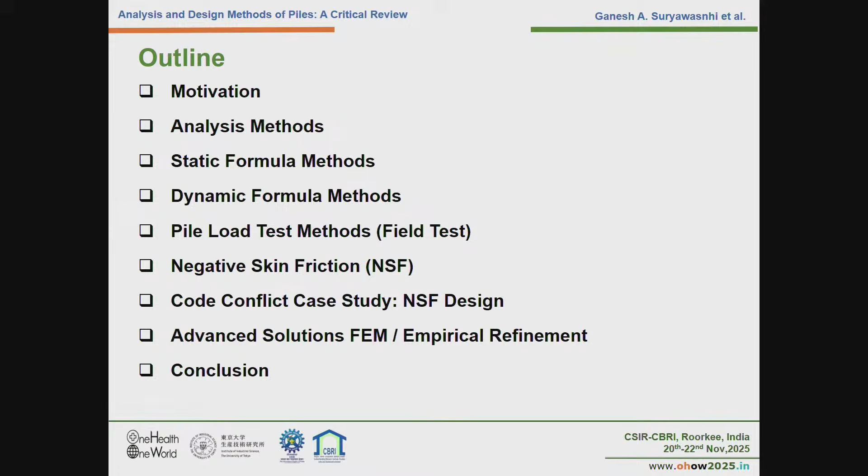Good afternoon all. Myself Ganesh Suryawasnhi. My presentation topic is on analysis and design methods of piles, a review. Outline of my presentation is motivation, analysis methods such as the static method, dynamic methods, then pile load test, that is a field test, and negative skin friction, and advanced method like FEM, and conclusion.

Construction activities are increasing day by day. So for larger and complex structures where soil has poor bearing capacity, we need to rely on deep foundation systems like pile foundations, and the current design methods lack uniformity with substantial differences across different standards and local engineering practice. This is because of the complex and heterogeneous nature of the soil conditions.

So if we go back to the analysis methods, we have to rely on the static methods, and because of the complex nature of soil, it is difficult to accurately determine the strength and deformation parameters of soil, such as shear strength, angle of friction, and coefficient of earth pressure. So small errors in these parameters lead to large errors in calculation of the capacity of the soil.

So second parameter is the empirical correlations, like different empirical factors that we generally use, that is the adhesion factor and bearing capacity factors. They are empirical in nature, so we have to rely on local experience.

This also creates errors in the ultimate capacity of the soil. Installation effects mean the effect of changing properties of the soil during pile installation is not taken into account in the static formulas, which can also lead to errors in actual pile capacity determination. Then the third problem is of layered soil.

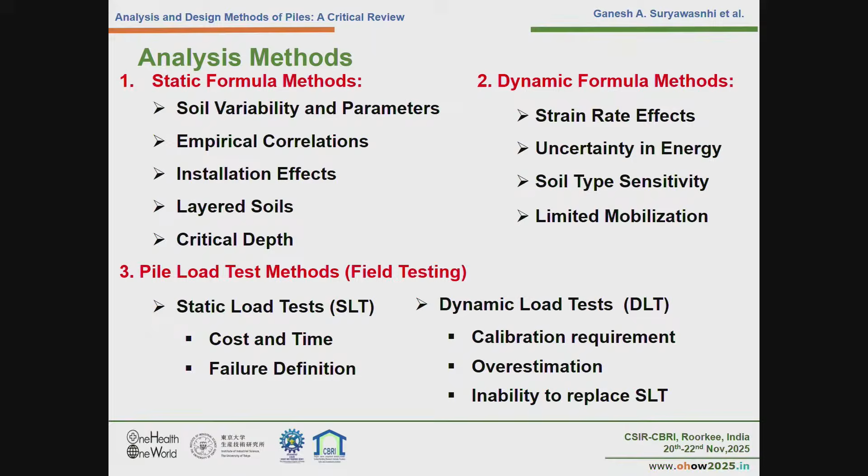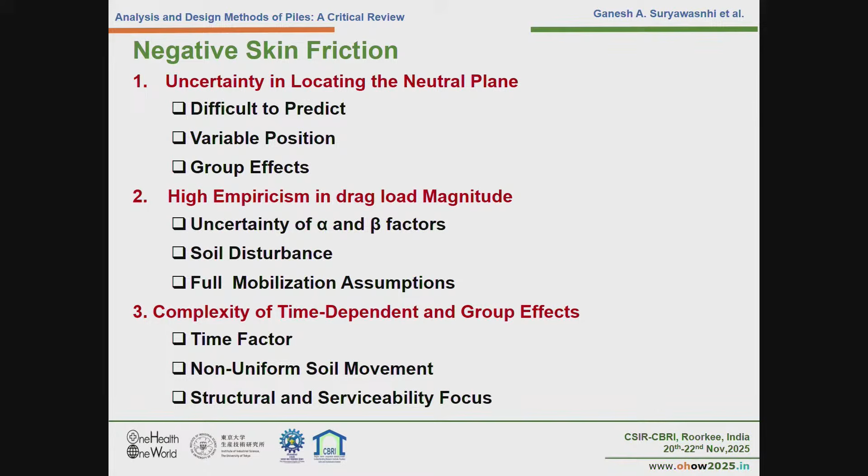Next is related to negative skin friction, and here again we have to rely on the neutral plane, meaning location of the neutral plane, which is a critical depth. This is a sensitive parameter, directly depending upon the relative stiffness of the pile and soil, applied service loads, and stiffness of the soil tip. The position of the neutral plane is variable, so we have to rely on empirical factors and the complexity of time dependent and group effects.

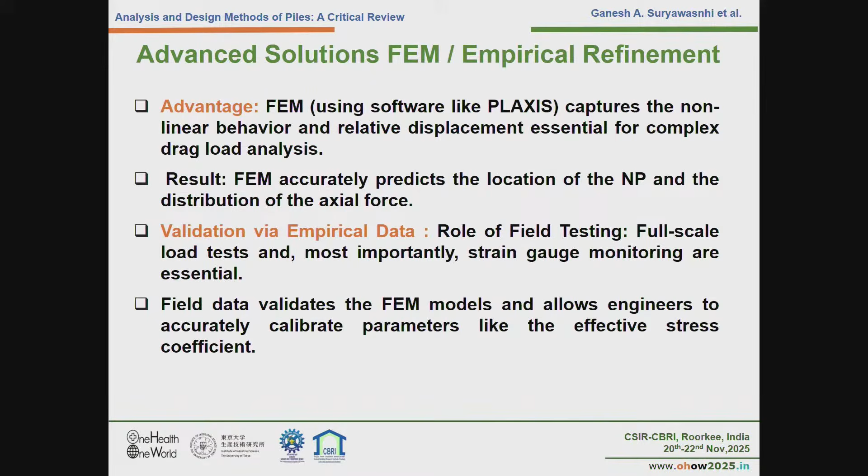One more important point is related to group effect: the efficiency of a pile as a single pile versus its efficiency in a group will be different. For the center pile it will be different, for the corner pile it will be different, which leads to conservative designs. So we have to create more empirical relations. Advanced solutions like finite element methods may model the soil accurately, but we need to give input parameters.

Lastly, we have to rely on static methods and so on. Our code, IS 2911, doesn't explicitly say whether the single pile method is to be used, but gives a stability check instead. It should clearly say whether to use it or not, but the code is relying on checks.

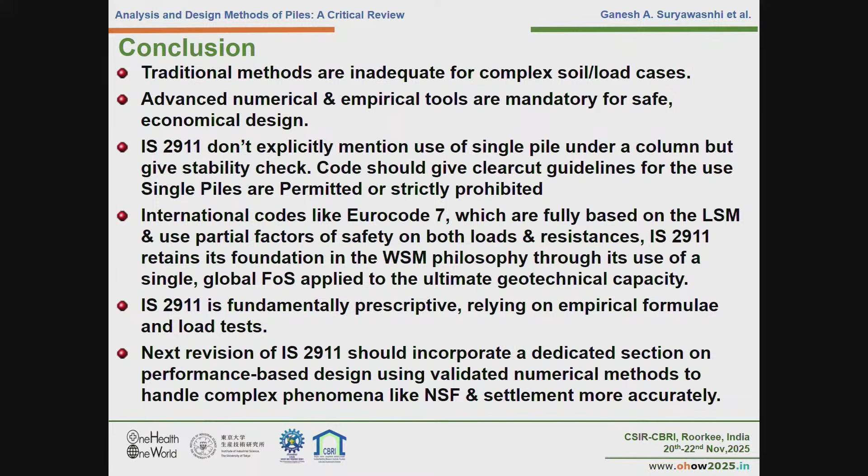International codes like Eurocode use limit state methods with partial safety factors, but our code relies on one global safety factor based on the WSM philosophy. This means it is prescriptive and depends upon empirical formulas and field tests. This means in future the code should...